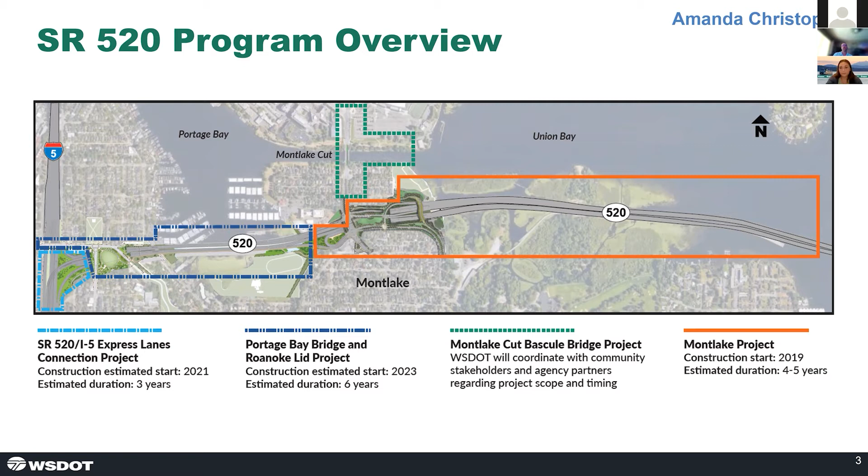Much of what WSDOT does, pursues, and achieves is guided through our strategic plan. It provides us a vision, a mission, and values. WSDOT's vision is for Washingtonian travelers to have safe, sustainable, and integrated multimodal transportation systems. Our mission is to provide safe, reliable, and cost-effective transportation options to improve communities and economic vitality for people and businesses. The SR 520 I-5 Express Lanes Connection Project looks to meet these needs for the community.

Seattle is experiencing, as many of you know, a population and employment boom. The Eastside tech-driven cities continue to experience rapid growth. To help manage growth, community members and community leaders identified the need for a safe, reliable transit and HOV link between downtown Seattle and the Eastside via SR 520. The purpose of the project is to extend SR 520's new transit and HOV system onto the I-5 express lanes, creating a direct bus and carpool connection between SR 520, South Lake Union, and downtown Seattle.

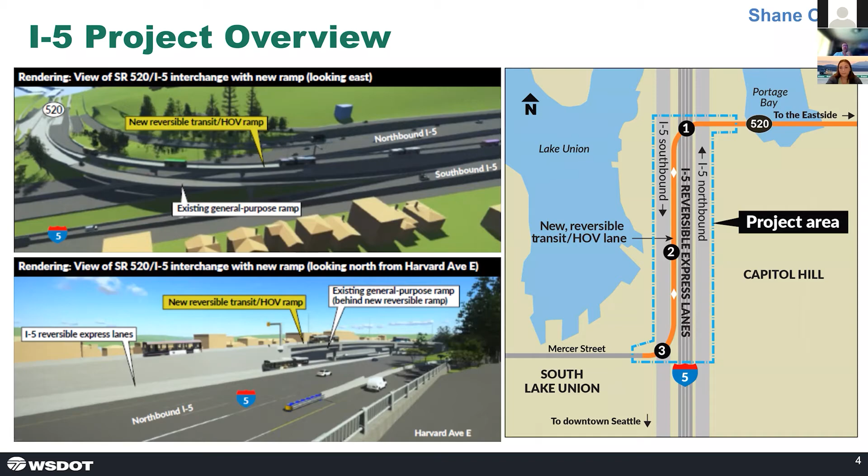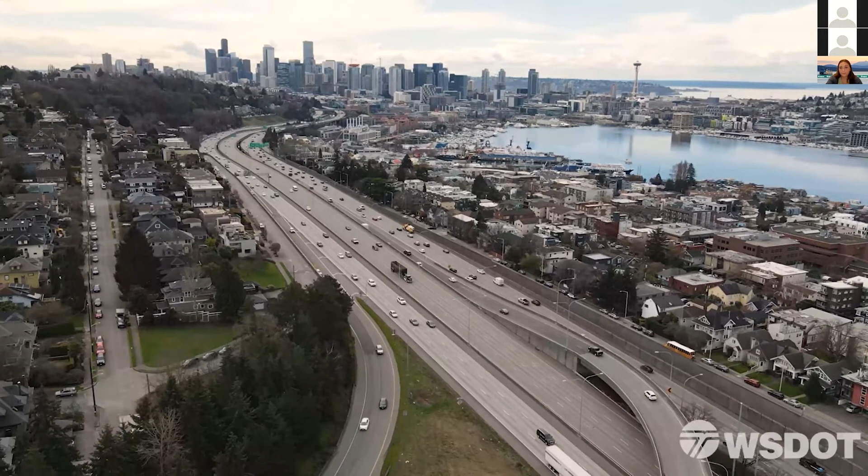A quicker, more reliable bus and carpool connection between the Eastside and Seattle's booming South Lake Union employment hub is on the horizon. The State Department of Transportation is building a dedicated transit and HOV lane between State Route 520 and I-5's Mercer Street interchange. When the project wraps up in 2024, buses will have their own lane, free of general purpose traffic, along the reversible I-5 express lanes. By avoiding I-5's congested commuter lanes, transit riders will enjoy faster, more reliable trips between the Eastside, South Lake Union, and downtown Seattle.

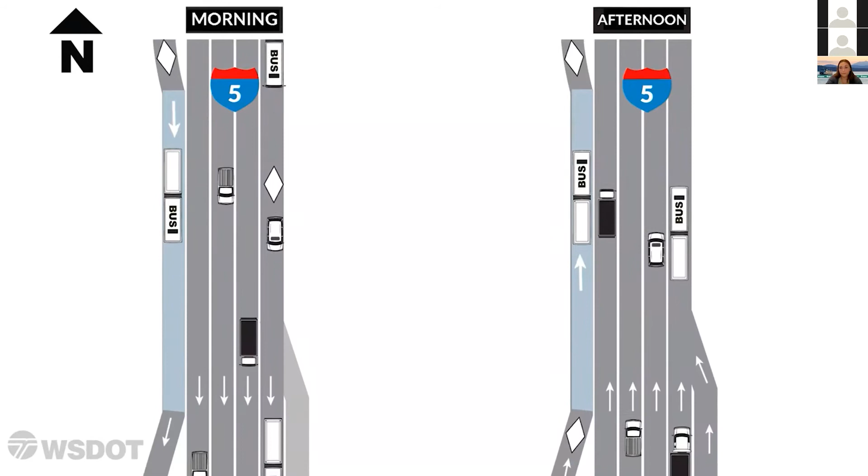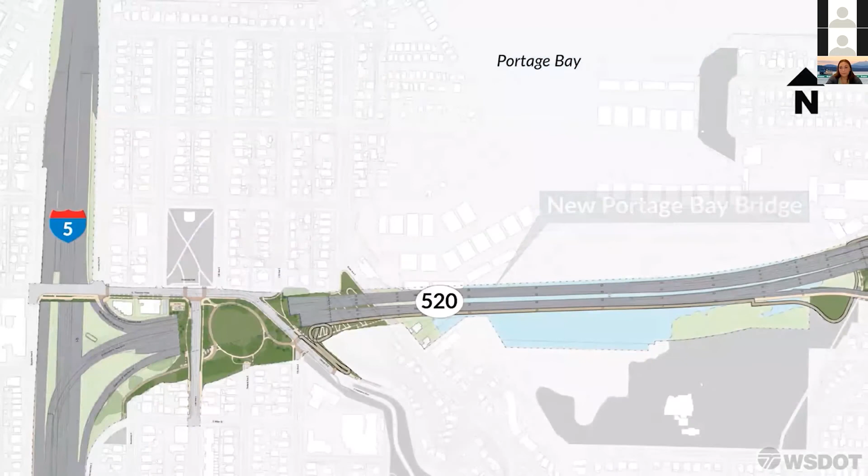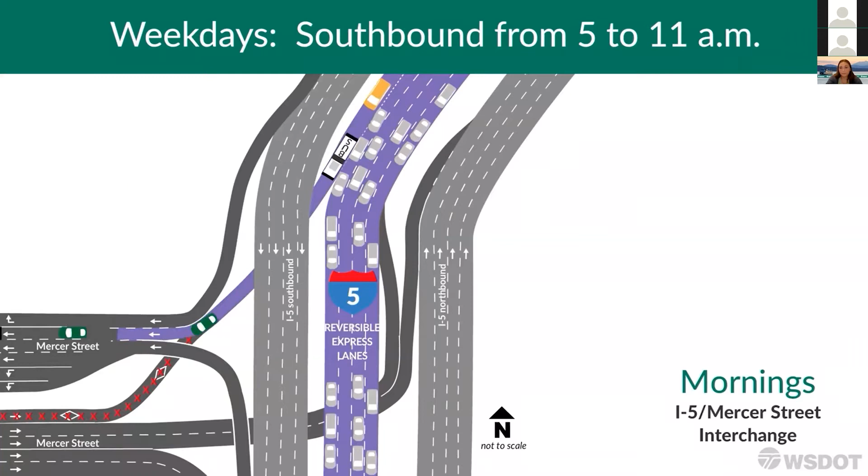Specifically, this project includes a new reversible transit HOV ramp between SR 520 and the I-5 express lanes, a dedicated bus and carpool lane alongside I-5's 4 reversible express lanes, and a modified reversible ramp between the I-5 express lanes and Mercer Street. Initially, only buses will use the new connection. Later, after a new Portage Bay Bridge and Roanoke Freeway lid are built, the reversible lane will open to carpool users. And just like the I-5 express lanes, the new reversible bus and carpool lane will operate southbound in the mornings and northbound in the afternoons.

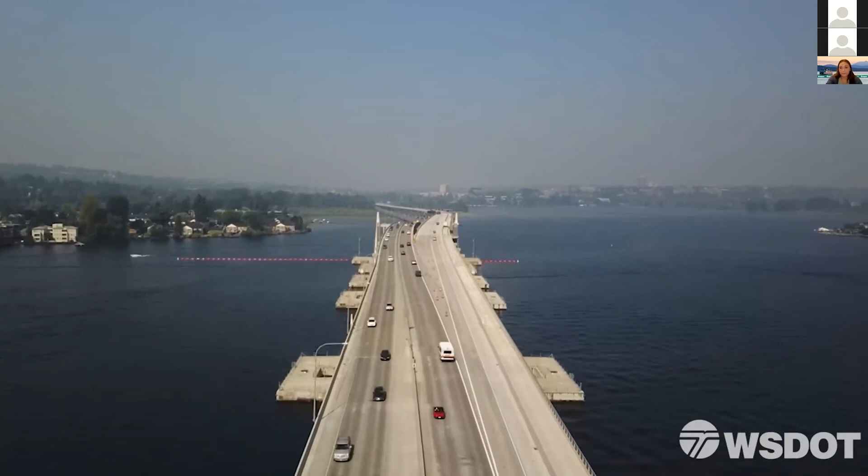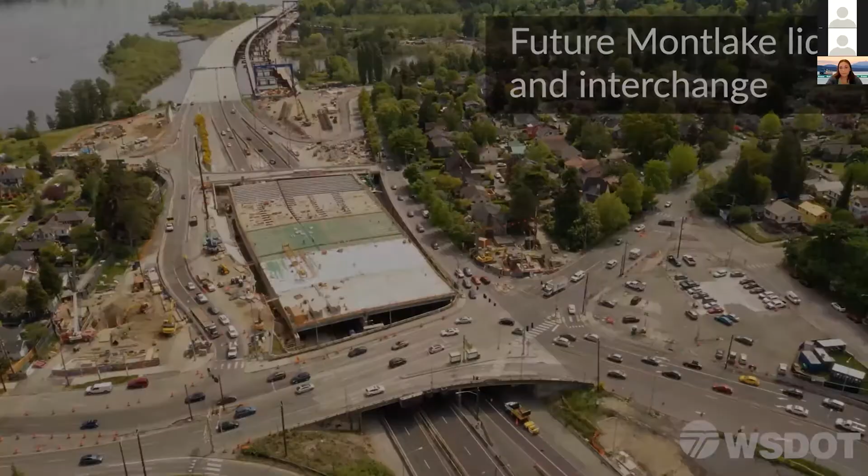The project is part of the broader ongoing reconstruction of SR 520, an effort that is replacing aging bridges and adding traffic capacity between I-405 and I-5. Once this work is complete, SR 520's bus and carpool system will extend from Redmond to Seattle.

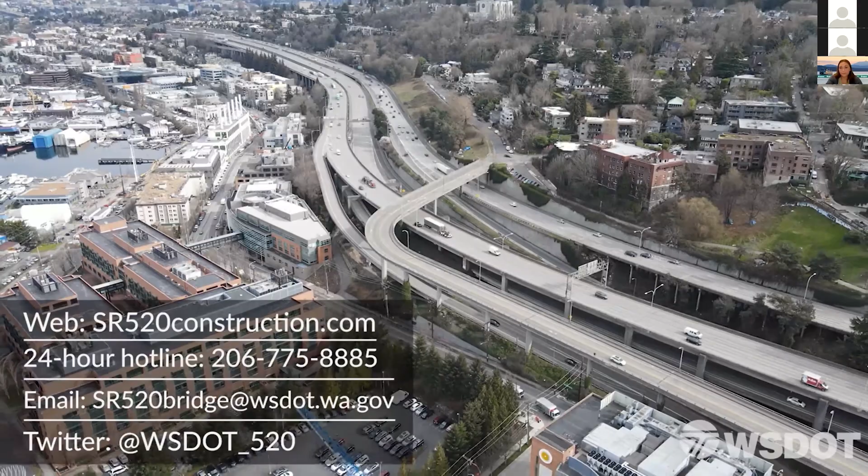So a lot of people are probably wondering about the project timeline. Let's cover that real quick.

The project is already underway and we're ramping up. It was awarded to Walsh Construction LLC, who's joining us today. It was awarded back in June, and the contract includes 575 working days, which means it should be wrapping up in the fall of 2023.

Most of the project will be completed at nighttime to avoid impacts to the traveling public during peak hours, also for safety measures. And the project will also be completed in stages to help manage the impacts to the community.

Walsh will be providing you with a preview of what will be taking place through the end of the year. And then, as time goes on, we have a communication and outreach program where we're going to be keeping the community and our project partners up to date on schedules, traffic impacts, and we'll get into some mitigation measures a little later in the presentation.

All right, let's bring on Walsh. John, are you joining us? Hi, Shane. Hi, everyone. My name is John Currier.

I'm the construction manager on the project with Walsh Construction. I'm going to give a quick overview of what everyone can expect over the coming months and into the winter as we get the project started.

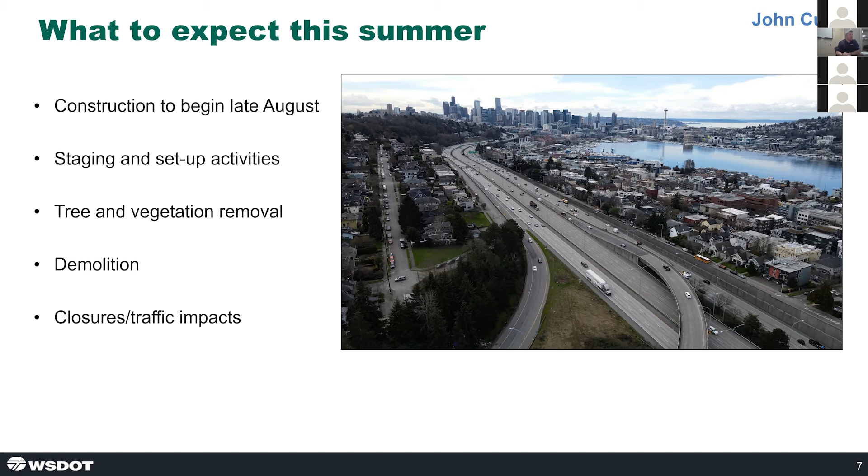As we shift into our major demolition and structural work in October, November, and into December, you can expect to see some ramp closures and lane closures along 520 and I-5. So the beginning of the work in August and September will be mainly at night and done under minor lane shifts. Then as work really starts to ramp up later into the fall and winter, you can expect to see some ramp and lane closures on I-5 and 520. Shane, I'll hand it back to you.

Thank you, John. Let's go ahead and go to the next slide. All right, so let's talk a little bit about construction effects and mitigation.

Another pillar of WSDOT's strategic plan is what we call practical solutions. And part of practical solutions is incorporating community outreach and engagement. It's done during the design phase, and also done very heavily during the construction phase. So WSDOT's not new to this. We understand the impacts construction has on highways and on communities.

That's why we seek to do work at night, with minimal impacts and lane closures. We want to keep business and commerce open. We want safety, that's a real top priority for us. So we're committed to being good neighbors and doing our best to mitigate disruption to the community and the traveling public.

And to do that, we've incorporated several measures into our project to better serve you. One of those is a community construction management plan. The plan essentially outlines the process through which members of the public have an ongoing opportunity to provide input into construction management decisions.

That can help mitigate the effects of construction activities on historic and other properties. We also have noise, vibration, air quality, and dust control plans. We have visual quality management that looks at aesthetics, glare, lighting, traffic, transportation, utilities, vegetation management, erosion control, staging, and WSDOT right-of-way. All of these are incorporated into the contract.

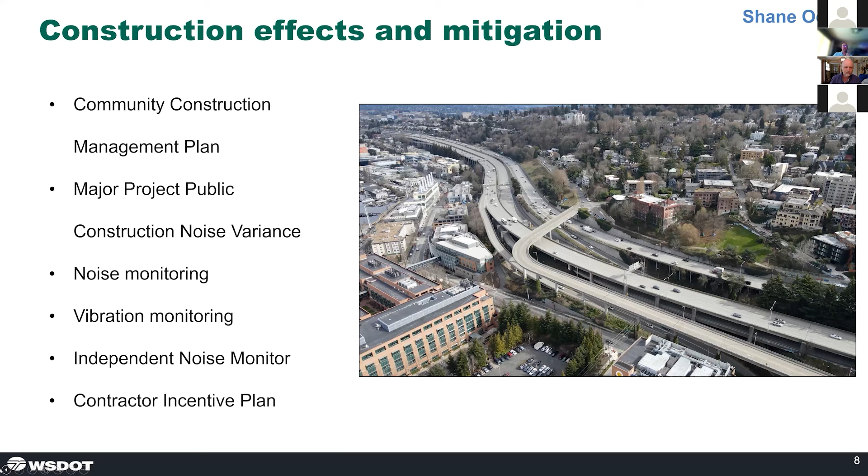Amanda, I guess we'll turn it back to you for communications, community, and outreach. Thank you. There are many ways to get a hold of us and to stay in touch throughout construction.

One of those ways is email. So you can email us at sr520bridge@washdot.wa.gov. We respond to these emails normally within 2 weeks of receiving them.

You can also visit the 520 Construction Corner, which will have up-to-date information on closures and impacts to both the traveling public and, if there are any bicyclist or pedestrian detours, anything like that can be found for both the Montlake project and the I-5 project on our Construction Corner.

Also, you can visit us on our 520 program website. You can follow us on Twitter. We keep all of these very up to date. And then finally, as you just met, David Goldberg is our community liaison, and he's a great resource for you as well. So we really encourage you to check out these options, stay in touch with us, send us your questions or comments.